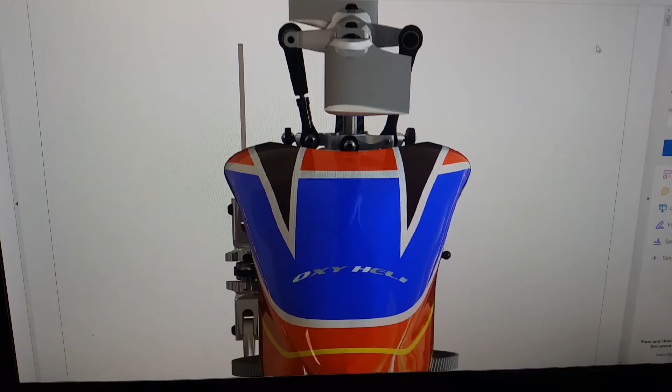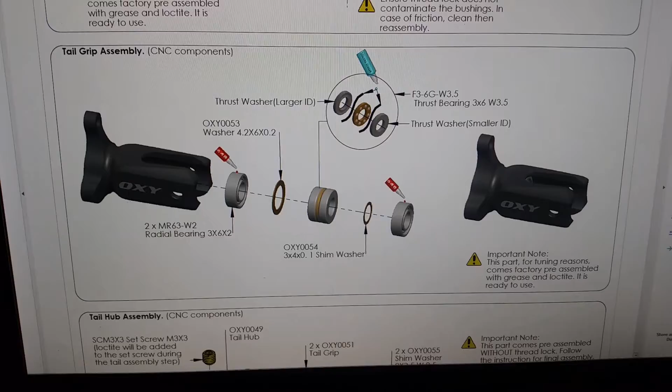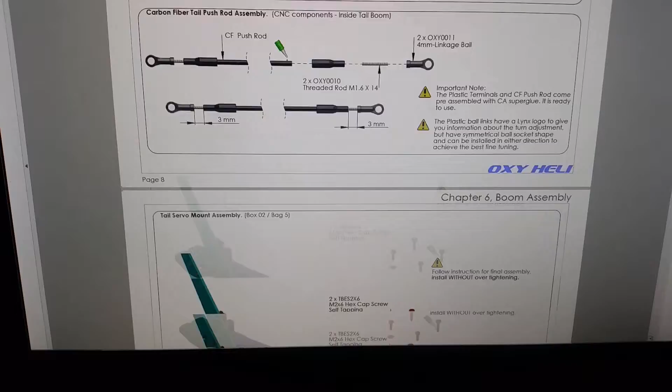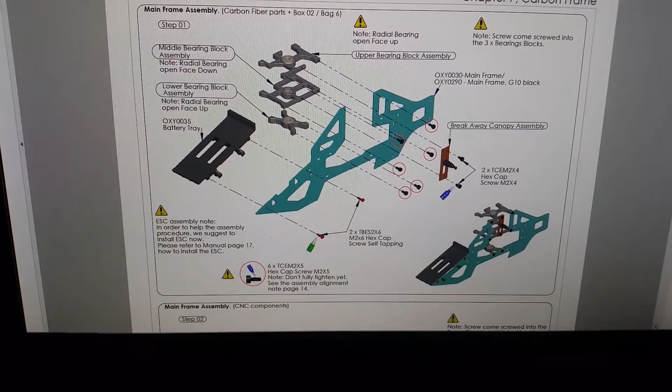Okay, so this is just a quick look at the Oxy 3 manual, just because I was gloating how good it is. Let's see how detailed everything is. Everything's nicely color coordinated. You know, one of the things I didn't like about some of the micro helicopters, particularly the 180, there's just not really any good information on how to build it. So when you break it, you're kind of wondering what piece goes where, and there's just one diagram showing you everything.

But I would say, having owned an Align and a Gaui, this instruction manual definitely beats all of them. Just look at that.

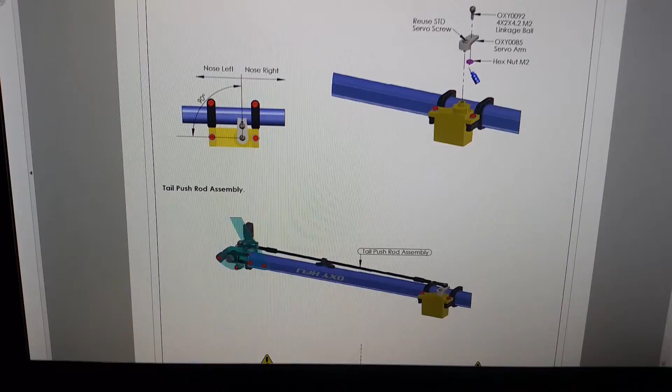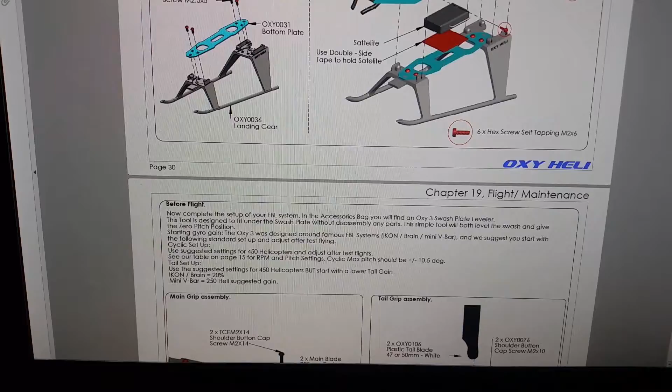Wow, that took a long time putting this together. You can see just looking at this, it's not your typical small helicopter that you get from Horizon Hobby or something.

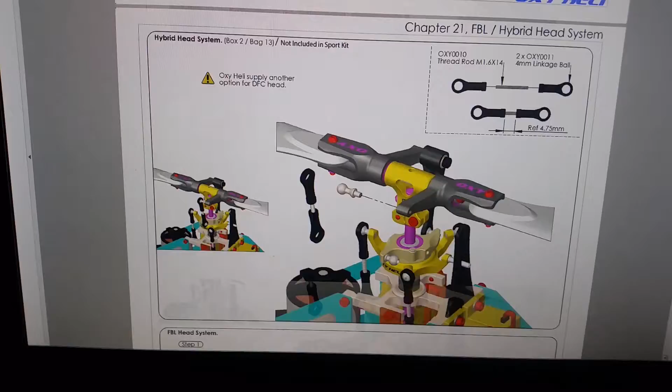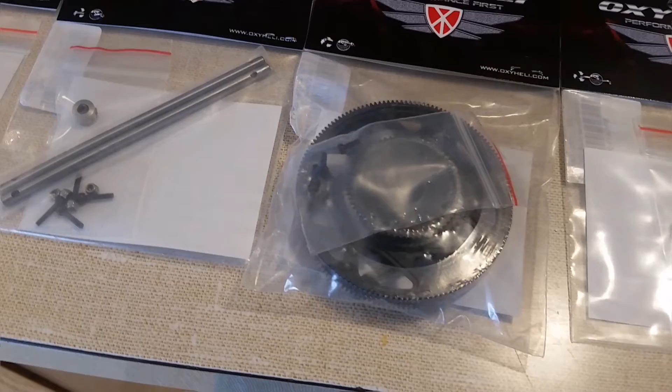Here are some of the extra parts that I've acquired. I've decided to start building up a supply of parts so that when I have my first crash, which I'm sure will not take long, I'll already have the parts in stock. And the nice thing about Oxy is they give you 2 of each, so you get 2 feathering shafts in the one pack, and 2 main shafts. So they do a pretty good job of giving you a good amount for your money.

Most of these are really not too expensive. I don't remember the exact amount, but I think maybe $8 to $10 for say the 2 main shafts together. So parts are really not overly expensive. On the forums, it seems like most crashes for people cost somewhere around $30. It's just a general number.

And now I'm kind of glad I already got these parts, because some people are already looking for main shafts that seem to be out of stock, especially at the big vendors like A-Main and Heli Direct. So if you're gonna get this helicopter, I would start building up some supplies just to make sure you're not sitting around waiting for a part if you crash.

Okay, so this is a quick look at the blades that come with the Oxy 3 stretch kit. Here's those 285 Zeo blades, which I gotta say are pretty impressive looking. They come with the kit. Now, interesting too is Oxy gives you 2 pairs of tail blades, the 47mm and the 50mm. The 47mm are, from what I've read, to be used if you're doing really high head speed 3D smack type flying, whereas if you're doing smooth 3D, stick with the 50 millimeter tail blades. Now, just for comparison, here is the Lynx 275 blades that I'll probably be using for now. I gotta say, those 285 blades are pretty sweet looking.

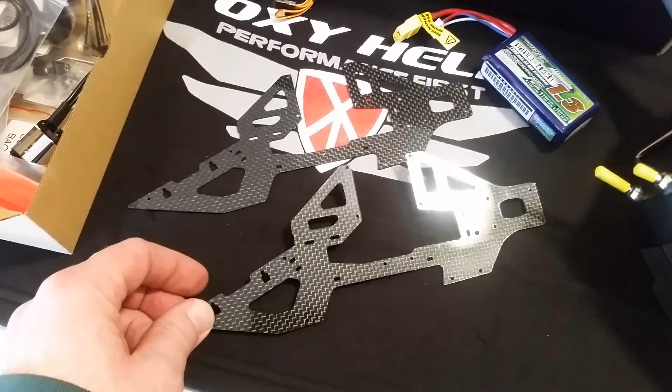And also the Oxy forum on HeliFreak has a lot of good information. One of the reasons I decided to purchase this kit was just from reading the different reports about users who were using it for everything from smack to guys who just really wanted to get more stick time and needed to practice orientation and different maneuvers.